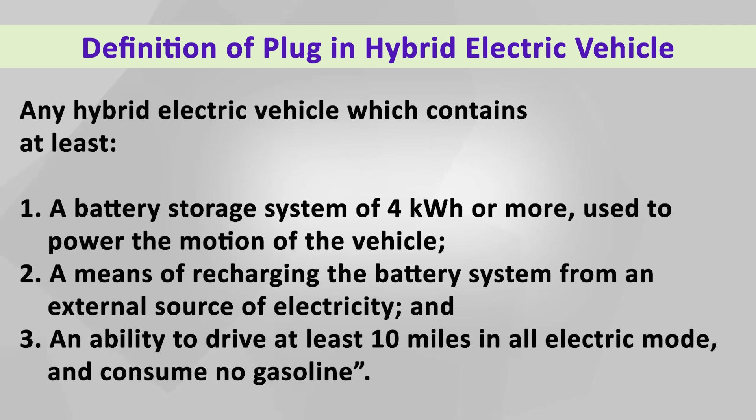It means a plug-in hybrid electric vehicle is a hybrid vehicle whose battery can be recharged by plugging it into an external source of electric power, as well as by its onboard engine and generator. This definition highlights the dual capability of the plug-in hybrid vehicle to recharge its battery from an external electrical source and through the conventional internal combustion engine and generator system available within the vehicle.

In this vehicle, not only the fuel tank but also the battery pack can be recharged by an external source to extend the all-electric range or all-electric operation of the vehicle. When the battery pack is fully charged by an external source, the plug-in hybrid electric vehicle operates as an electric vehicle with extended all-electric range, and then switches to hybrid mode when either the battery reaches its predefined state of charge or the vehicle demands extra power for acceleration.

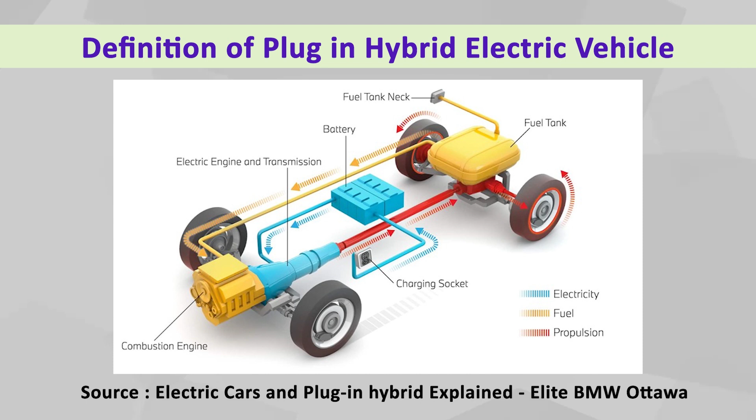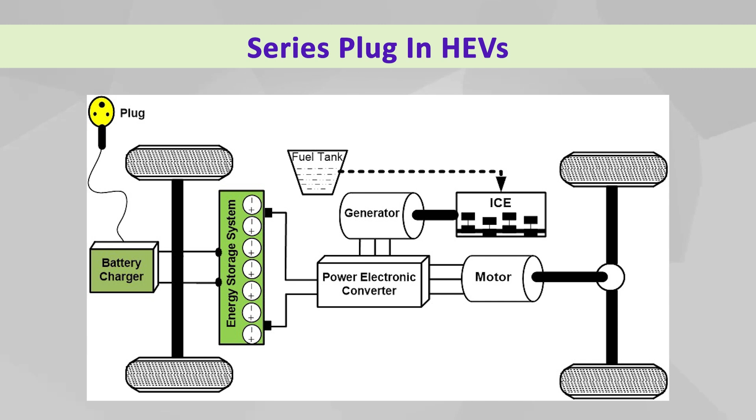It is quite obvious that all available hybrid electric vehicle configurations can be easily converted to plug-in hybrid electric vehicle. What does it mean? It means that the configuration of hybrid electric vehicles, like series hybrid electric vehicle, the moment you connect a battery charger along with a provision or plug to connect it with the power outlet, it becomes a series plug-in hybrid vehicle.

Similarly, in a parallel hybrid electric vehicle, if you connect the battery with a battery charger and a plug to plug it with the outlet utility, the parallel hybrid electric vehicle becomes the plug-in hybrid vehicle of parallel configuration. Similarly, in a series-parallel combination, if you place battery chargers and a mechanism for connecting it with the utility grid, the series-parallel hybrid electric vehicle becomes the series-parallel plug-in hybrid electric vehicle, and it is equally true for the complex hybrid electric vehicle with the charger and connecting mechanism.

With the connecting guns, you can convert or transform the complex hybrid electric vehicle into a complex plug-in hybrid electric vehicle. So from an architecture point of view, there is not much difference in a plug-in hybrid electric vehicle; it is similar. Based on their configuration, we can derive different combinations: series plug-in hybrid electric vehicle, parallel plug-in hybrid electric vehicle, series-parallel plug-in hybrid electric vehicle, or complex plug-in hybrid electric vehicle.

So, the plug-in hybrid vehicle is a transitional technology between battery electric vehicles and hybrid electric vehicles. As one can see, the configuration of plug-in vehicles is very similar to hybrid electric vehicles. The difference between the normal hybrid electric vehicle and the plug-in hybrid electric vehicle lies in the battery charger, as mentioned. This inclusion of the battery charger along with the connecting gun gives the flexibility and freedom to place a higher capacity battery on board, resulting in higher all-electric drive range, lesser emissions, and better efficiency.

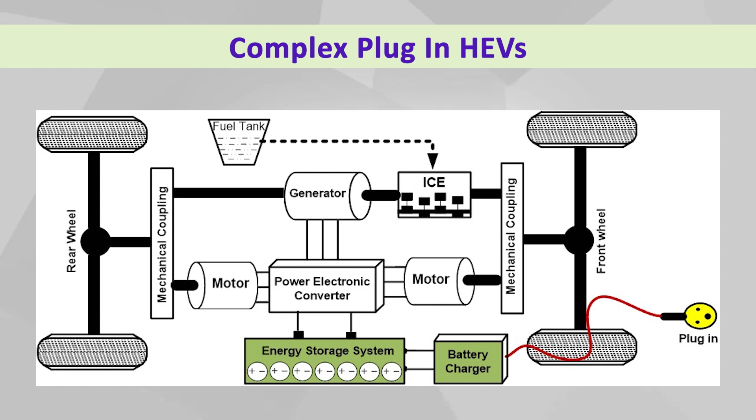Similarly, it creates a new avenue and area where the integration of the hybrid electric vehicle and the grid can be studied in detail with greater length.

If you discuss the components of a plug-in hybrid electric vehicle, it has the same components as a hybrid electric vehicle, like fuel tank, IC engine, exhaust system, battery, traction motor, power converter, thermal management system, etc. In addition to these common components, plug-in hybrid electric vehicle has two more components that create the difference with the conventional hybrid vehicle.

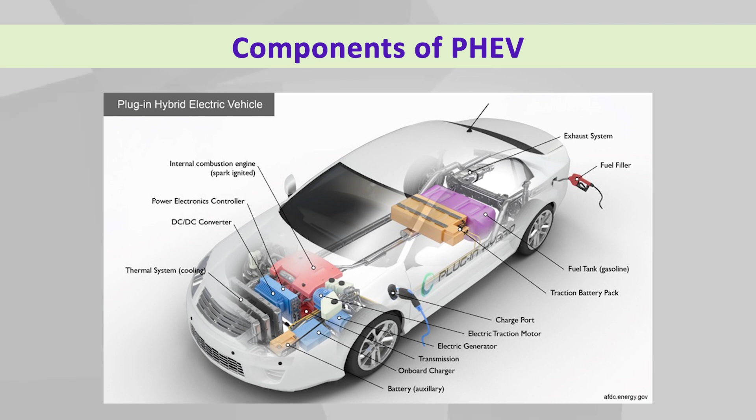The first one is the charging port. The charge port allows the vehicle to connect to an external power supply in order to charge the onboard traction battery. Another one is the charging mechanism. This charging system can be an onboard charging system or an off-board charging system. On-board charging system is an integral part of the vehicle, and off-board charging system remains outside of the vehicle.

This charging system takes the incoming AC electricity supplied via the charge port and converts it to DC power for charging the traction battery. It also communicates with the charging equipment and monitors battery characteristics such as voltage, current, temperature and state of charge while charging the battery pack.

While monitoring this voltage, current and temperature, this charging system can devise a suitable mechanism and rate of charge, at what speed the battery has to be charged, keeping the battery life and battery health into consideration.

As mentioned earlier, all possible configurations of hybrid electric vehicle can be transformed into plug-in hybrid electric vehicle. Hence, the different attributes and operating modes associated with a particular configuration of hybrid electric vehicle are equally applicable for plug-in hybrid electric vehicle. To avoid redundancy, these have not been discussed here.

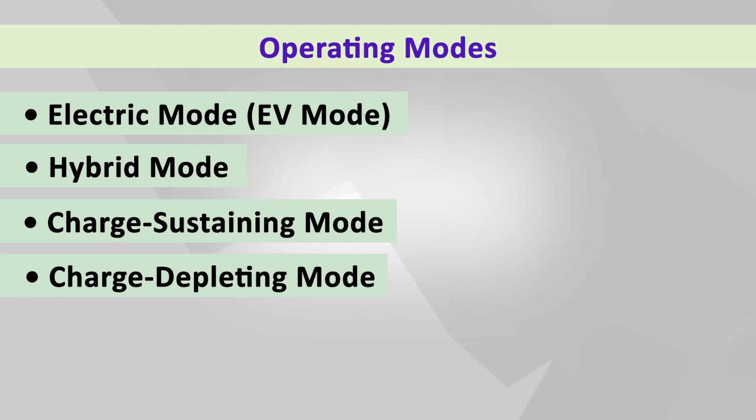In charge depleting mode, the vehicle primarily uses the battery until its charge is depleted, and this mode helps in maximizing the all-electric range of the vehicle. So this is the glimpse of the different operating modes associated with plug-in hybrid electric vehicle.

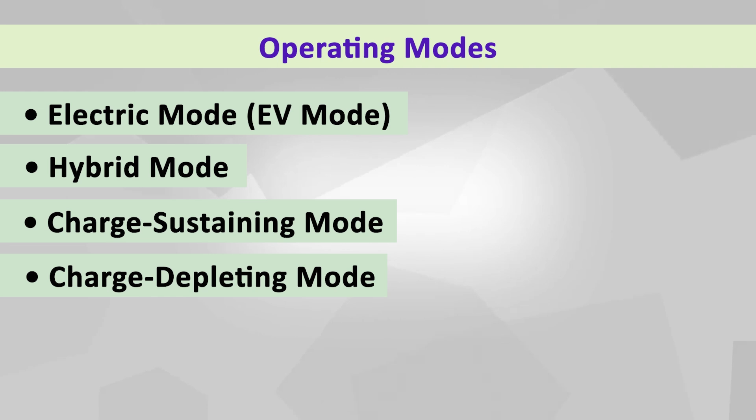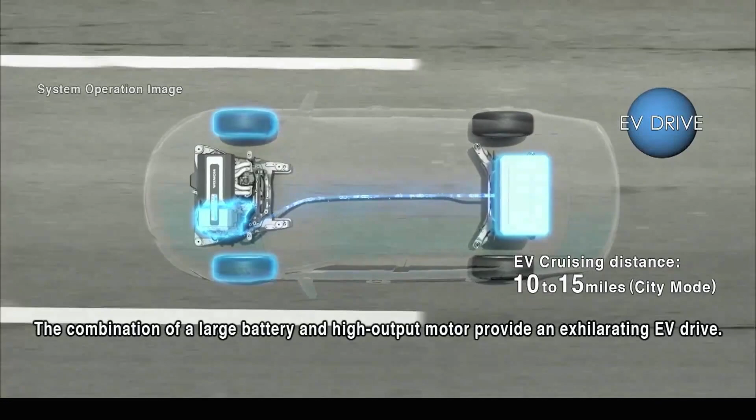Let us have a short video prepared by Honda for its hybrid vehicle, to explain its hybrid vehicle concept. This video explains the operation of the hybrid electric vehicle as well as the plug-in hybrid electric vehicle.

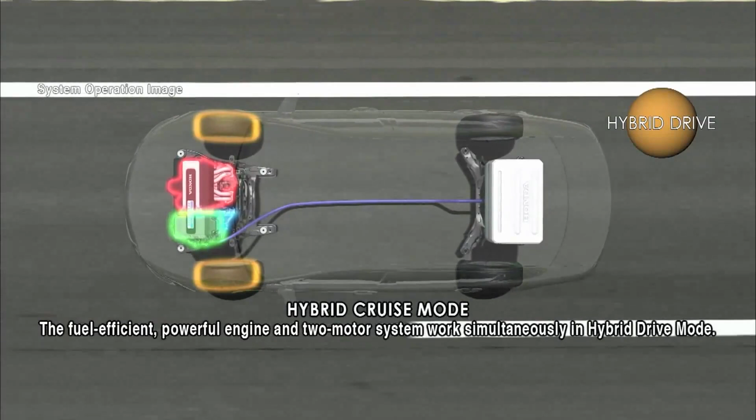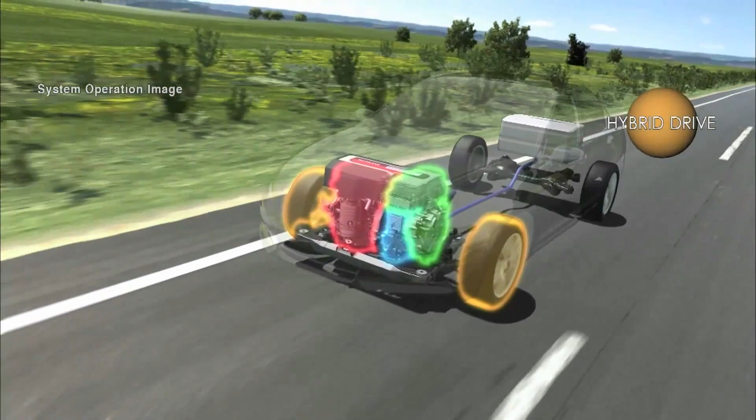In this we can see the combination of the large battery and high output motor provides accelerating power to the motor, and the motor drives the vehicle in complete charge mode. In this case, the electric propulsion system alone supplies power to the motor and the motor runs the wheels, meaning it is purely running on EV drive or electric propulsion system.

On other mode, it is a hybrid mode. The fuel efficient powerful engine and two motor system work simultaneously in hybrid drive mode.

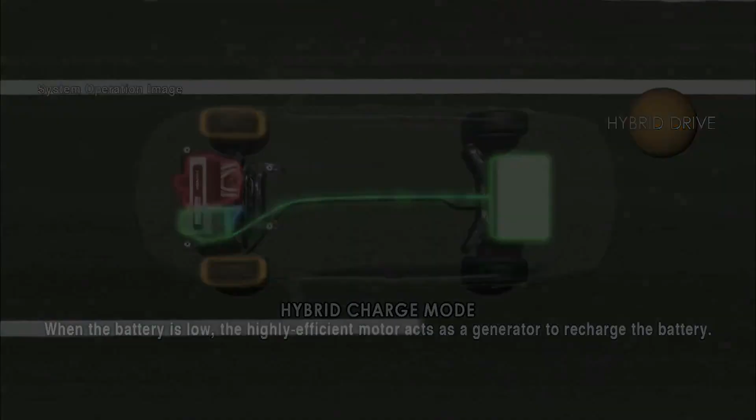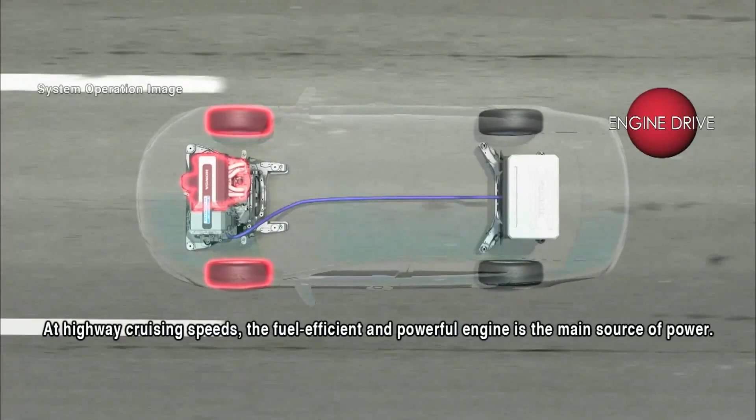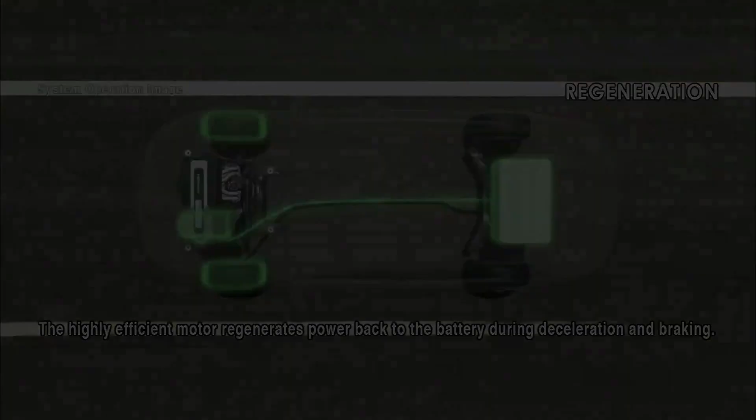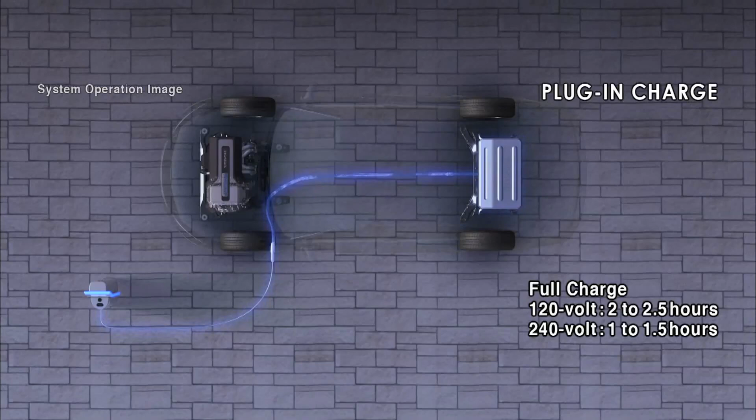In another mode, during excessive or hybrid acceleration, the additional power of the battery is taken to enhance the acceleration of the vehicle, and the vehicle goes into full throttle.

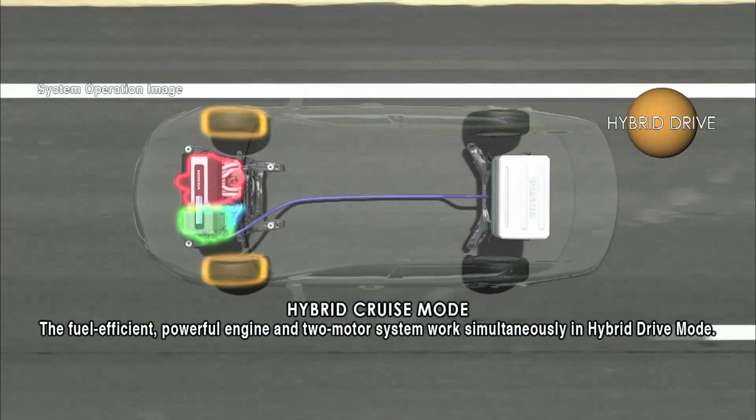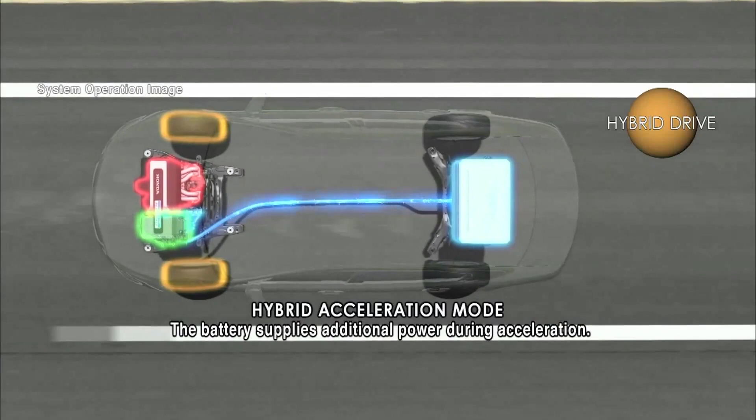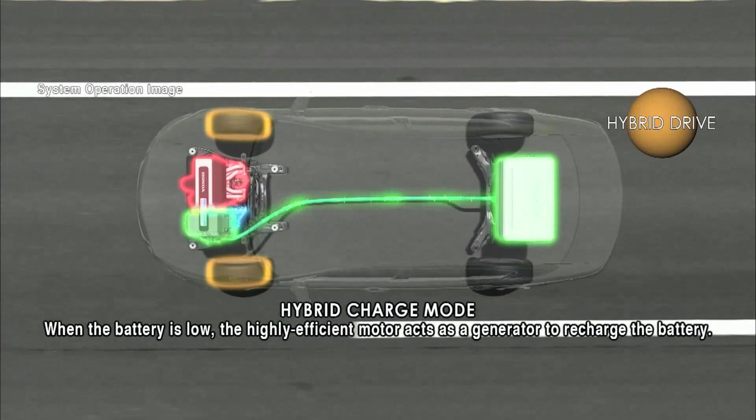This particular mode deals with the regeneration mechanism. During braking or deceleration, a significant amount of energy is recovered and fed back to the battery for further charging. During non-operation times, the vehicle can be connected to an outside power outlet, and this power outlet can charge the on-board battery, giving additional extended all-electric range.

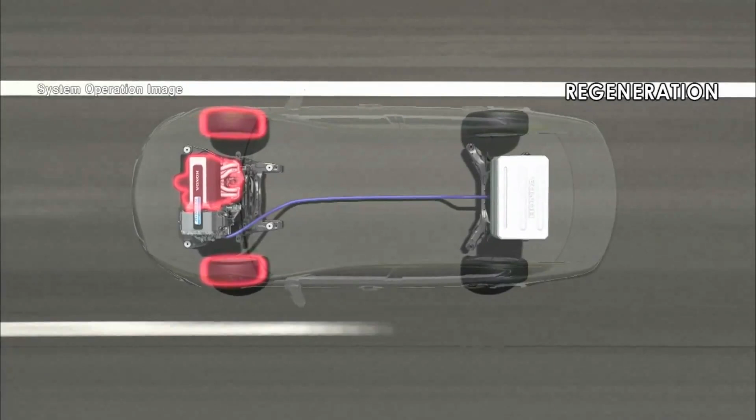This charging can be done as slow charging or level 1 charging, or it can be done as fast charging. In addition to these well-known operating modes, there are some additional operating modes that come with a plug-in hybrid electric vehicle. These modes result from the integration of the hybrid electric vehicle with grids, and are known as grid to vehicle and vehicle to grid. These modes are only possible because of the integration of the hybrid electric vehicle with the power grid.

In grid to vehicle, the grid supplies power to charge the onboard storage battery of the plug-in hybrid vehicle during charging mode of operation. In vehicle to grid, which is a highly researched area, the power stored in the battery can be fed back to the grid, meaning the onboard storage system feeds power back to the grid during battery discharging mode. Both grid to vehicle and vehicle to grid operations happen when the vehicle is at standstill or not in operation on the road.

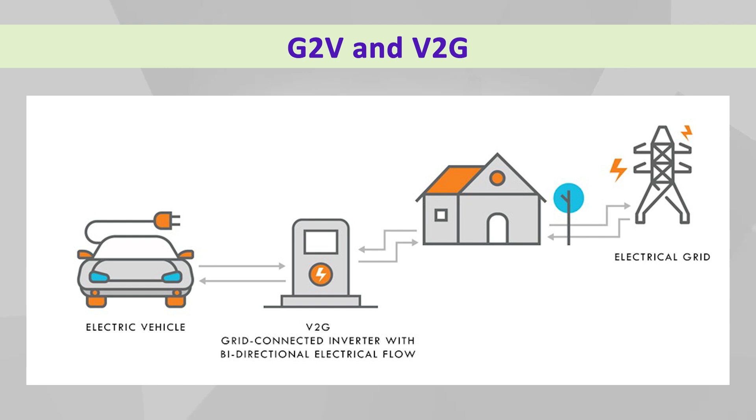The G2V or V2G concept utilizes the plug-in hybrid vehicle's battery as a storage medium for electricity. When the vehicle is plugged into a charging station, it draws power. Conversely, when the grid experiences high demand or the vehicle battery is fully charged, it can be discharged and used as a backup power supply.

There are key components for the G2V and V2G application of the plug-in hybrid electric vehicle, and these components include the battery management system. It manages the battery health and the charge and discharge process. In V2G or G2V, the battery has to go through frequent charge and discharge, which might create an adverse impact on the battery's health. So battery management becomes essential for smooth operation of the G2V and V2G concept, ensuring the safety and efficiency of the process.

Another important component is the bidirectional charger. It can be on board or off board as mentioned earlier. It converts AC power from the grid to DC power for charging the battery, utilizing power electronics converters and control mechanisms for regulating the charging and discharging of the battery based on input received from the battery management system. Another important component is the grid interfacing.

While interfacing the vehicle with the grid, one should take care of the different norms required for grid interfacing of the vehicle. As I mentioned, the IEEE 1547 standard has to be followed. It supports bidirectional power flow for advanced systems.

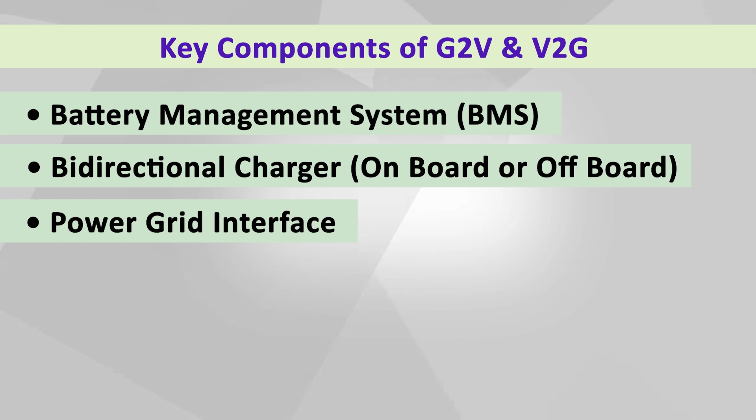In addition to this, another major component is the communication interface, which uses standards like ISO IEC 15118 for communication between vehicle and grid. This communication system also facilitates demand response and load management. These two are very important, as this communication mechanism is responsible for getting the onboard battery information, its SOC, while also conveying the amount of power available on the grid.

It might be possible that the grid is at its peak load and it is getting difficult to push power to the vehicle. In that case also, this communication mechanism plays a crucial role in creating coordination and synchronization between exchange of power from vehicle to grid and grid to vehicle, based on the availability of power on either side.

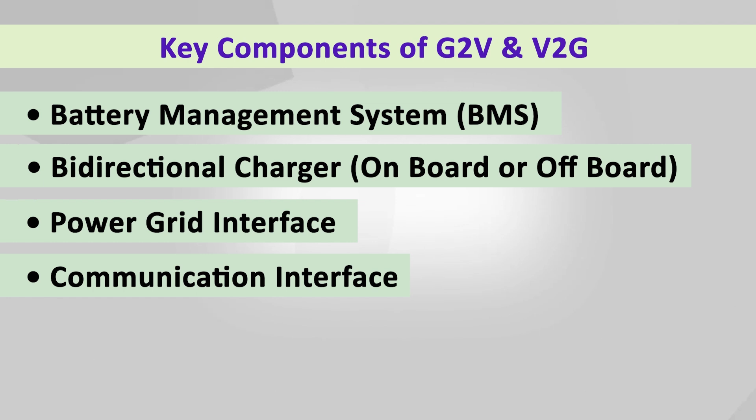So the integration of the vehicle with the grid brings a lot of advantages and benefits to the system. One of the benefits is improved grid stability. By allowing plug-in hybrid electric vehicles to store and discharge electricity, vehicle to grid helps balance the grid's power supply and demand, reducing the risk of blackout and brownout.

Though the battery capacity is higher in comparison to hybrid electric vehicles, it is lesser in comparison to fully electric vehicles. So again, it is interesting to see how much power it can support. Certainly a single vehicle cannot provide that much support, but multiple vehicles at a time, if connected to the grid, can deliver good support.

It enhances the vehicle range. By utilizing the grid G2V system, plug-in hybrid electric vehicles can extend their range by charging their batteries from the grid, reducing the need for frequent refueling and also dependency on the IC engine for drawing the charge. It also resolves different issues and provides the benefit of integration and utilization of renewable energy sources.

It resolves beautifully the intermittency associated with renewable energy sources, as the plug-in electric vehicle can charge during periods of high renewable energy generation, helping to mitigate the intermittency of renewable sources like solar and wind. At the same time, it creates a good balance of penetration of power to the grid and to the vehicle for charging, and also helps in storing the energy.

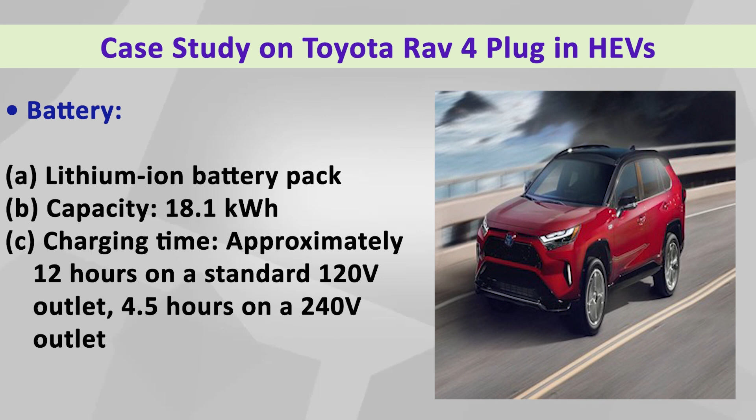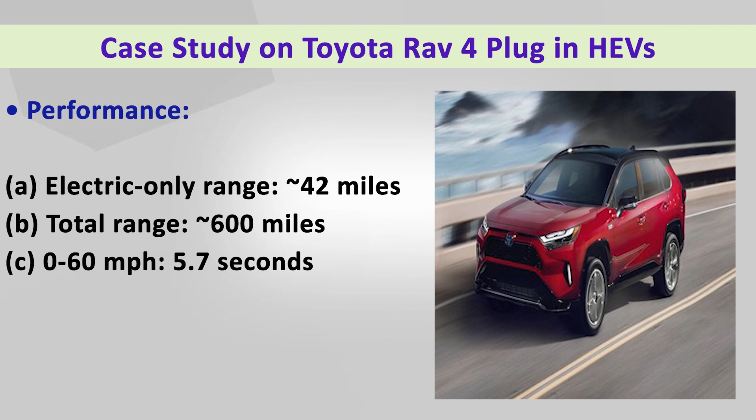If we talk about the performance of the vehicle, in electric range it travels 42 miles, and in general, combining electric mode and hybrid mode, it delivers 600 miles, and it reaches 60 miles per hour in just 6 seconds.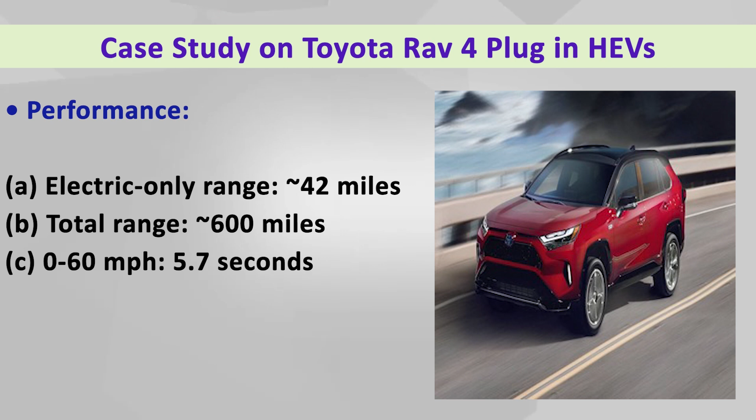As far as fuel efficiency is concerned, its electric fuel efficiency is 94 miles per gallon, and hybrid fuel economy comes to somewhere around 38 miles per gallon, while combining both the IC engine and battery.

It has all-wheel drive. It is a combination complex hybrid electric vehicle. The RAV4 Prime comes with a standard electronic on-demand all-wheel drive operation, enhancing traction and stability in various driving ranges, and it provides regenerative braking, recovering significant amounts of energy from all the wheels.

If we talk about the driving mode, it offers EV driving mode, hybrid mode, and auto mode, where it automatically switches from electric vehicle mode to hybrid mode.

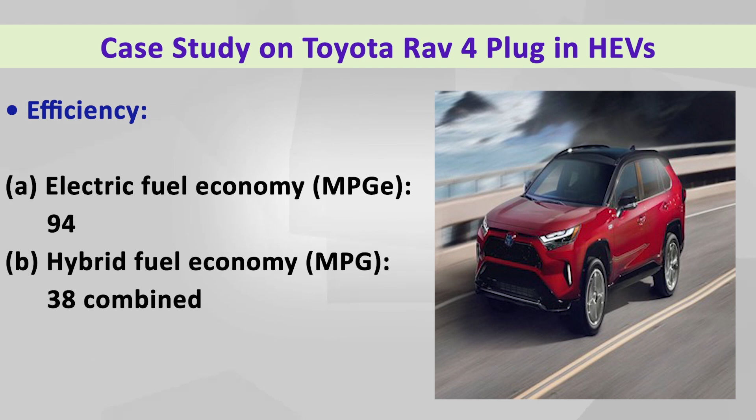Next is the benefit that this electric vehicle offers, very much similar to the benefits offered by other hybrid electric vehicles.

It minimizes environmental impact and delivers better performance, with versatile operation. The ability to switch between electric and hybrid mode offers flexibility for different driving scenarios, from daily commutes to long road trips, and this switching takes place automatically.

If we talk about the challenges, cost is one of the biggest challenges. Charging infrastructure is another important challenge, and since the battery is subject to frequent charging and discharging, battery life may get degraded quickly. These are a few things that need to be taken care of properly.

In summary, the Toyota RAV4 Prime exemplifies the potential of plug-in hybrid electric vehicles to offer a balanced blend of performance, efficiency and practicality. It addresses many challenges associated with traditional vehicles and fully electric vehicles, making it a compelling option for a wide range of consumers.

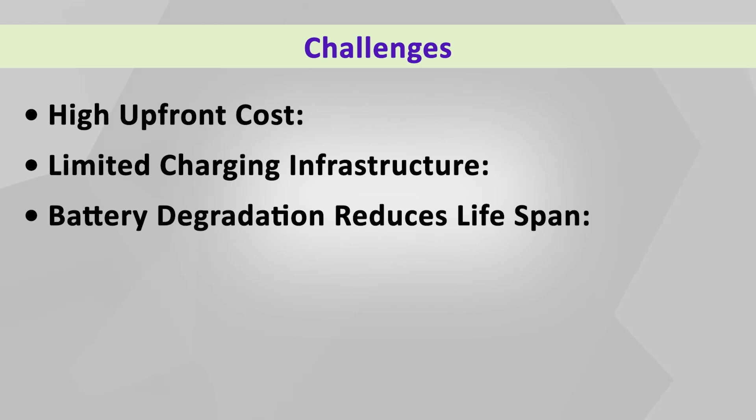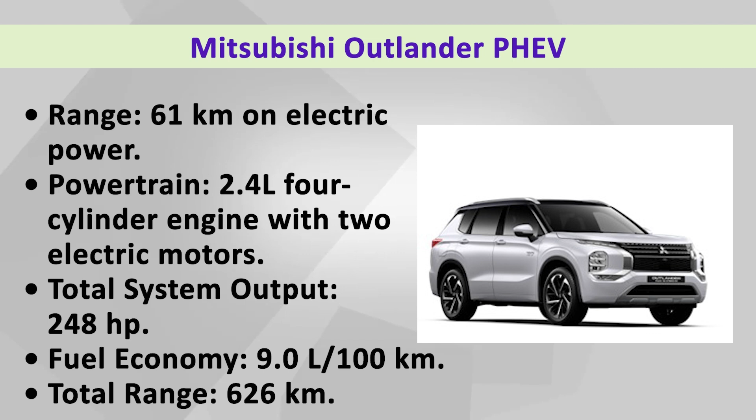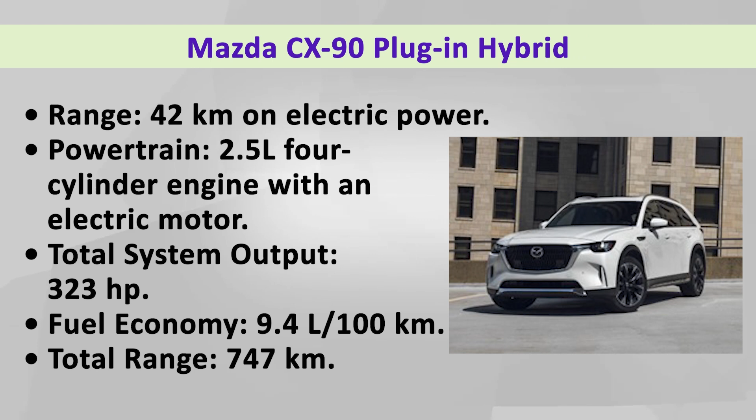In comparison to Toyota RAV4, there are other plug-in hybrid electric vehicles like the Mitsubishi Outlander PHEV, which has a 2.4 liter engine and gives 61 kilometers of electric driving range. Another is the Mazda CX-90 PHEV, with 42 kilometers of electric drive and a 2.5 liter IC engine. Another is the BYD Song Pro, with 81 kilometers of electric drive and a 1.5 liter turbocharged IC engine. These are some of the competitors or available options of plug-in hybrid electric vehicles in the market.

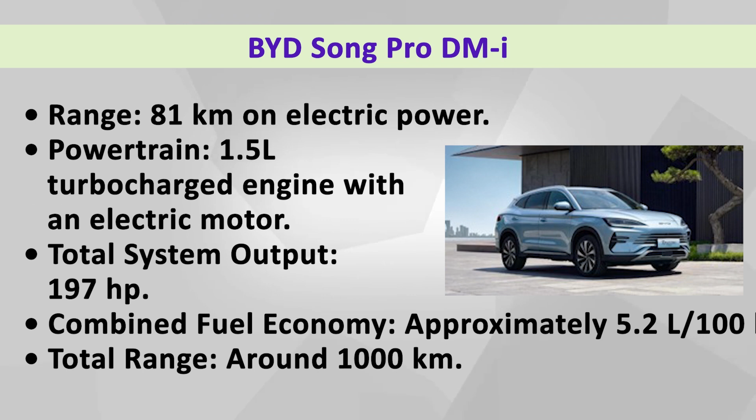The vehicle models we have discussed, based on the plug-in hybrid vehicle architecture, represent significant achievements in the market, offering a compelling combination of performance. All these models address many challenges associated with traditional vehicles and fully electric vehicles, making them viable options for a wide range of consumers. As technology advances and the market evolves, these plug-in hybrid electric vehicles are poised to play a crucial role in the transition to more sustainable transportation solutions.

In summary, plug-in hybrid electric vehicles are ideal for motorists who want to use their car in a variety of ways. You can use the electric motor for daily commutes, but also take advantage of the great range and flexibility of the petrol engine when you go on longer trips.

This covers the different aspects of plug-in hybrid electric vehicles, related to their working, operations, some operating modes, V2G and G2V applications, and the different benefits coming from the integration of hybrid electric vehicles and the utility grid.